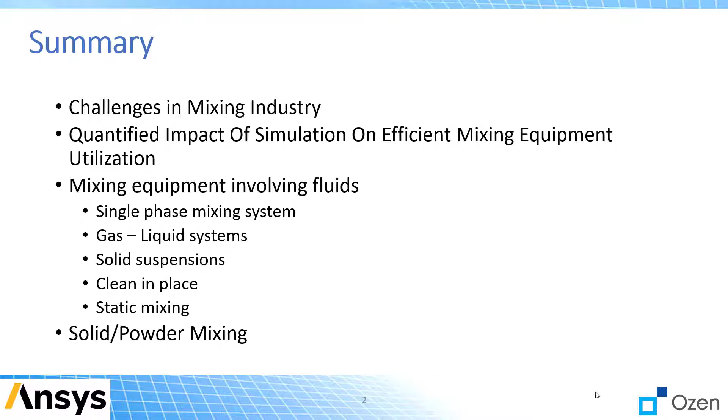Today we are going to make a presentation about simulation of mixing equipments and show you how computational simulations can improve these equipments under operating conditions. In this presentation, we are going to talk about the challenges in the mixing industry, quantified impact of simulation on efficient use of mixing equipment, and also we will show some examples of how simulation is used in this field. We will divide this presentation into sections. First, we will talk about mixing equipments that involve fluids, and later, we will talk about solid powder mixing.

Mixing is a common upstream process among different industries, let's say chemical, pharma, consumer products, food, among others. While the product is different, the objectives are similar, namely increasing the yield while ensuring the required mixing behavior and hence the final product quality. In the past, mixers seemed black boxes where processes were improved mostly by trial and error. However, the science and technology involved in the design, functionality, and application of the mixers indicate otherwise.

Generally, some of the aspects to consider in the mixer design processes are the temperature, the need of aeration, the agitation level required, and the flow dynamics behavior. Due to the lack of adequate sensors, it is impossible to perform a complete characterization of the flow inside the mixing tanks. Also, the costs associated with experimentation in mixing tanks, particularly for big ones, make it unviable to develop trial and error processes. For this reason, computational fluid dynamics has been used in the last years for accelerating and improving the mixing tank designs.

One of the engineering challenges in the mixing tank design is how to predict their performance for different products and operating conditions, as well as how to adapt these tanks for process changes. Again, the objective is to increase the yield. On the other hand, customers typically have different plants across different geographies, but they need to ensure product consistency. This is what scale up and scale down means. Let's say, how to ensure the same product is coming out from different plants having different tank sizes.

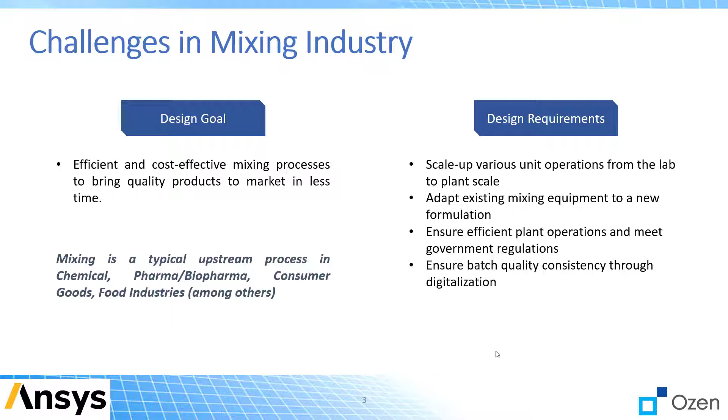For that, the design requirements can be summarized as follows. For example, doing a scale-up of various unit operations from the lab to the plant scale, adapt the mixing equipment to a new formulation or operating conditions, ensure efficient plant operations and meet the government regulations, and finally, ensure batch quality consistency through digitalization. Basically, this is what process engineers work on when they want to improve or to design mixing equipment. And for this, computational simulation is a very, very good tool to help achieve this goal.

Now, let's talk about how simulation has helped some industries improve their operations and their revenue when mixing tanks are used. One of the ANSYS customers developed an improved impeller for the mixing tank used in fiber manufacturing. The proposed design provides 5 times better mixing for solid suspensions using 12% less power. Simulation helped the engineering team make design decisions that balance mixing performance and power draw. Another customer was able to decrease the time required for cell culture growth by 40%. This means several days of time savings. Details are presented in the webinar above.

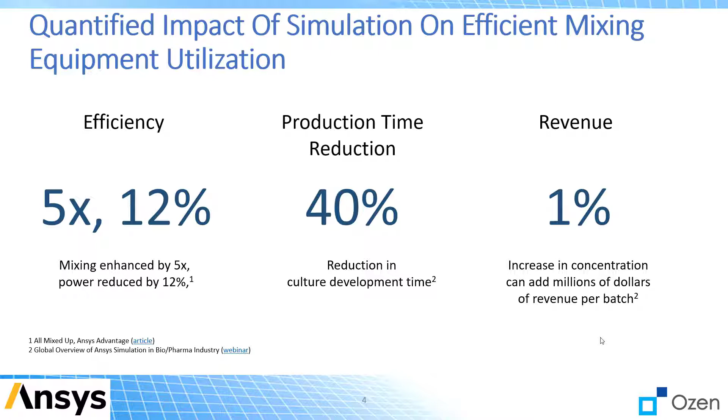According to discussions with different pharma companies, the use of simulations allowed them to have an increase in their revenues of around 1%. This means millions of dollars of revenues per batch. You can see more information about this in the webinar mentioned above. Now, let's talk about some applications for mixing equipments that involve fluids.

For doing this, it is common that the first analysis is done using a single phase mixing system. Then, with that in mind, using CFD allows to completely characterize the flow behavior in both simple and complex geometry. It is also possible to determine the influence of the tank and impeller geometry over the fluid dynamic behavior inside

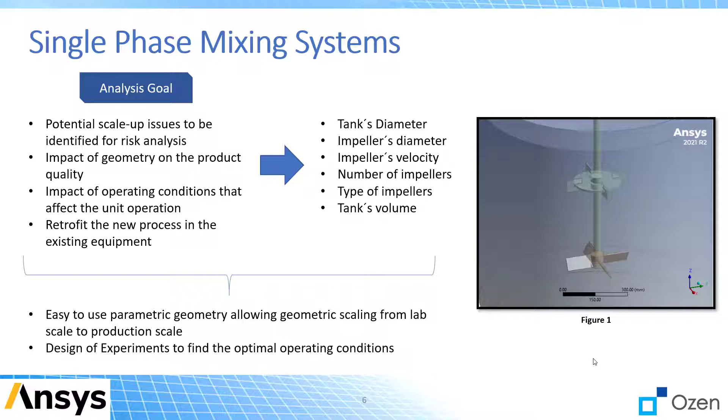To summarize, a common first approach in the design process is to assess the mixing tank behavior using only a single phase. By doing this, there is a reduction of the required computational time for solving the model, which in consequence makes it easier to do parametric studies or design of experiments to get adequate operating conditions or for scaling purposes.

As we previously mentioned, doing scale-up represents a significant challenge, both in time and money, for certain processes. By doing your own CFD analysis or by doing a consulting project with us, your company can achieve the necessary process understanding and accurate scale-up conditions for your mixing tanks to go from lab scale to plant scale. With CFD, it's possible to get valuable insights into the physics of scale-up and the risks involved.

Basically, CFD simulation helps companies in decision-making on equipment sizing and cutting down on expensive raw material usage for the testing process. Therefore, CFD simulation can save hundreds of thousands of dollars, providing characterization that applies to the overall scalability process, reducing the need for building and testing prototypes.

One straightforward way for doing scale-up using ANSYS CFD is by using the parametric analysis and the design of experiments. For example, in ANSYS applications, you can define key simulation properties to be parameters. Also, you can then manipulate the parameters at the project level in Workbench to investigate the design alternatives. A set of parameter values representing one design alternative is called a design point. You can create a set of design points in tabular form and run them automatically to perform a what-if study.

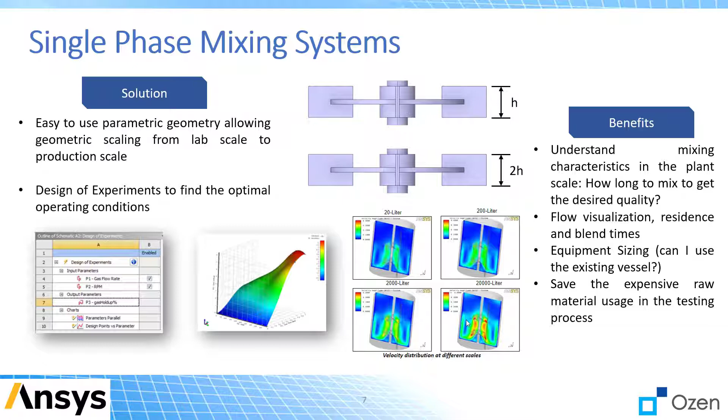For example, here you can see how the velocity distribution inside a mixing tank changes depending on the tank scale. The same procedure can be done for different flow fields, and the changes can be correlated and shown in a response surface manner for making decisions, as is shown in this picture.

Now, let's talk about another way of modeling the mixing tanks. Let's say applications where gas and liquids are involved. It is common to observe that in many systems the mixing process occurs simultaneously during filling. This historically has been a challenging problem, and while it could have been accomplished, it used to take a long time to simulate with high fidelity. Recent advances in solver technology have reduced the turnaround time for this simulation by an order of magnitude.

Also, you can see how the quantitative analysis is also linked to the qualitative analysis. Then we can visualize what's happening inside the mixer tank, but also we can check the numerical information that is also important for making decisions. This is a good feature of ANSYS tools for engineers that work in this kind of application.

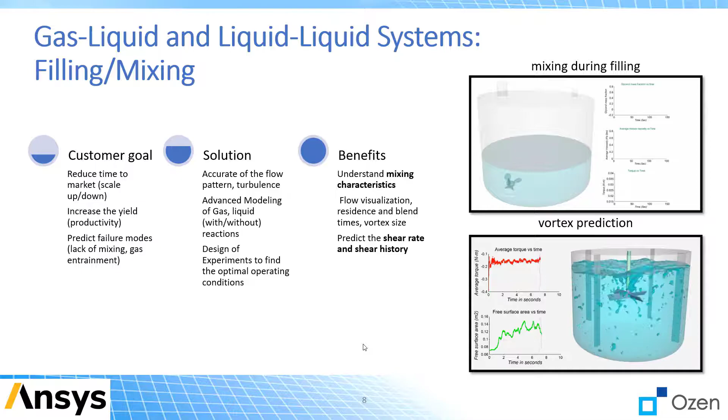Also, another application can be the prediction or the validation of the vortex depth when we have a stirring tank. For example, in this case, we compare our simulation with experiments from Ciofalo et al. Basically, we use two different approaches. We use a steady state simulation and a transient simulation using the hybrid NITA. That is one of the latest numerical approaches that ANSYS has developed, and it has given engineers a faster solution for transient simulation.

Then you can see here the comparison of the simulation results and the experiment results. They are pretty close, and this is good news. Then we can see here how it looks, and this is something that we can see using computational simulation. We can have an idea of the flow behavior inside the mixing tank, but also we can extract numerical data to compare with experimentation or with previous analysis to validate the model, or to generate new operating conditions or changes or new designs for improving the process.

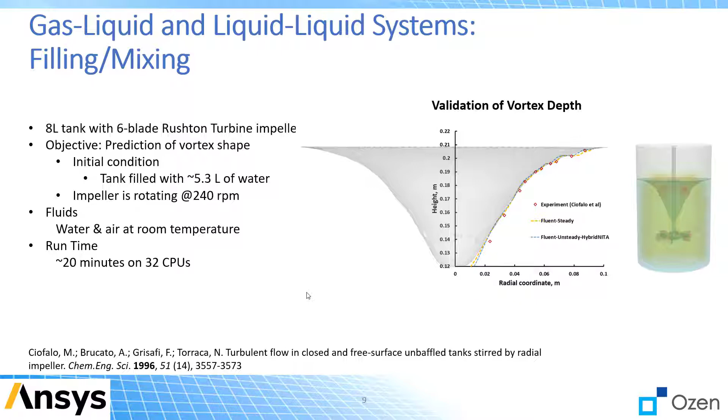Another application for gas-liquid systems are bioreactors, which are basically any manufactured device or system that supports a biologically active environment. One type of bioreactor is the air-lift bioreactor, which is a reactor for large-scale aerobic cultures where gas is inserted via an air-lift pump.

These kinds of systems have some operating problems that must be solved or avoided. For example, exotic strains of cell cultures grown in cutting-edge bioreactors result in therapies which can easily exceed $100,000 per gram of API. Ensuring sufficient respiration is critical to be sure that the goals are met. High yields mean more life-saving therapies produced per batch.

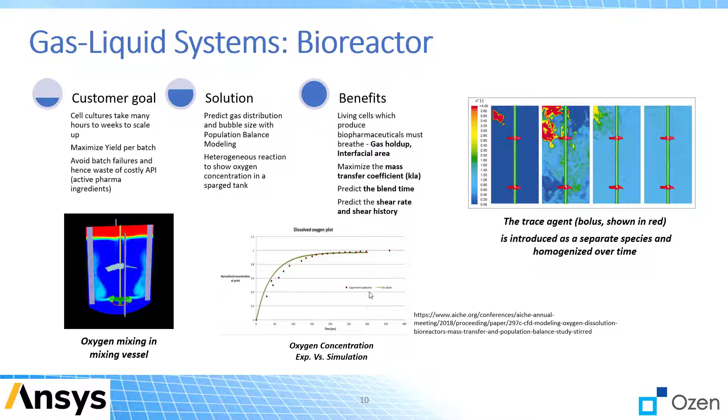Also, we can see here how a tracer agent is injected in a random part of the mixing tank and how it is distributed and becomes uniform and mixed with the solvent inside the mixing tank. It is very easy to observe this using CFD and to have insights into what's happening with the gases and with the mixing processes we are interested in.

Another application for mixing tanks is the analysis of solid suspension. In this case, the customer goal is different.

For example, the customer wants to ensure adequate solid suspension in the tank, also wants to analyze the dissolution or crystallization system, or to minimize the power requirements to have a longer impeller life and also a longer vessel life. For this, we have different solutions.

For example, we can predict the flow patterns and turbulence in an accurate way. Also, ANSYS has advanced modeling approaches for solid-liquid mixing, along with reactions or different drag models that accurately predict the particle behavior. Also, as a big part of this, we can create a design of experiments to find the optimal operating conditions.

With this, the customer receives some benefits. For example, it allows them to understand the mixing characteristics such as flow patterns, solid distribution, and cloud height. Also, they can predict the shear rate and shear history, and also they can minimize batch failures.

We can see, for example, in the picture in the left bottom corner, the effect of using one or two impellers on the cloud height and the volume fraction of solid inside the mixing tank. Also, we can see that this behavior is very similar or close to experiments. That means that the solutions given by ANSYS are tested and validated solutions for making decisions.

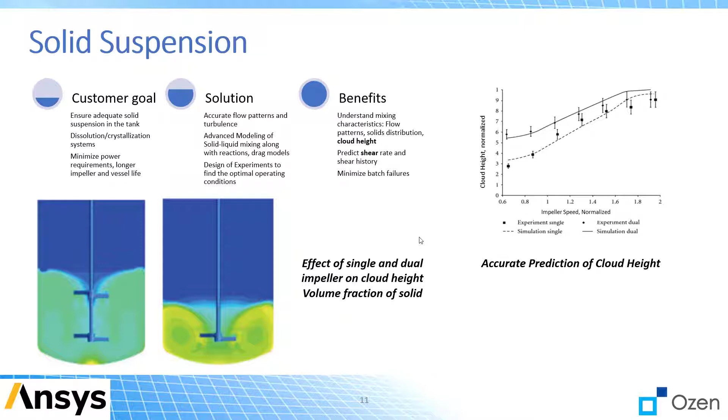Something important to remark is that understanding of solid suspension is key for many applications. For example, crystal growth, solid catalyzed reactors, dissolution studies, and situations where beads are hosting biological cells. A uniform solid distribution is a favorable outcome, but often increasing the speed may end up breaking crystals. At the same time, a minimum velocity, also called the just suspended speed, is required to be maintained.

As you can see in the left bottom animation, you can observe how the cloud height prediction and visualization can be obtained from a CFD simulation. On the other hand, the top right images come from a comprehensive analysis of a conical bottom reactor. In this case, water is used as liquid and solids are 180 microns in diameter. The reactor was subject to different agitation rates in this study.

Three rotational speeds were studied. You can see in the image that the solid distribution is compared for the three different rotational speeds. It was observed that the speeds of 100 rpm and 150 rpm are not adequate to suspend the solids. For instance, the velocity of 220 rpm was predicted to be good enough for keeping the solids suspended in the flow.

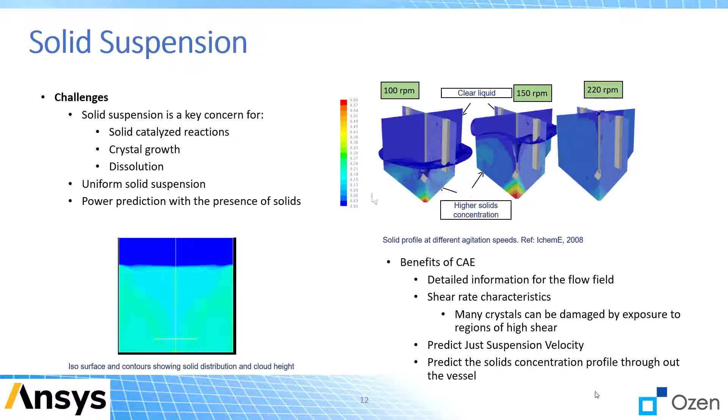For example, you can obtain the shear rate characteristics for checking if some of your solids will be damaged by exposure to regions with high shear. Also, you can predict the just suspended velocity, just to know if your solids will settle or not. Or also, you can predict the solid concentration profile throughout the vessel.

Another type of mixer equipment is the static mixer. Static mixers are common in the process industry, let's say chemical, consumer products, food, among others. They have the advantage of being part of a continuous process rather than a batch discontinuous one, which makes them attractive to high-yield processes. As always, the goal is to ensure proper mixing of the two or more ingredients. The challenge comes when the properties of these fluids are quite different.

Static mixers impose a considerable pressure drop, and hence accurate system sizing is of remarkable importance since it will directly influence the operation. At the same time, they also impose significant shear onto the system, which may result in material degradation, depending on the application, of course.

Different configurations of static mixer exist. For example, the SMX, the one that we are showing here, and the Kenics mixers are the most common. However, in recent years, there has been a development of new static mixers and new designs to improve the efficiency of mixing and also to reduce the pressure drop. For doing this, a virtual prototyping procedure using computational simulation is a good approach to prove concepts, to develop ideas, and to get the best result or the best design in a shorter time.

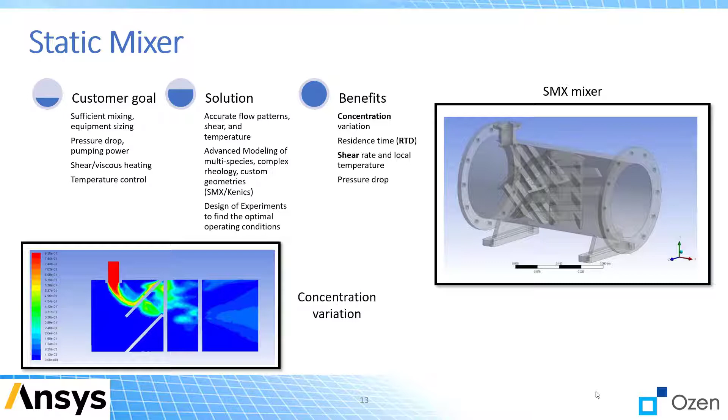And this is the kind of things that we can see and we can observe using CFD or computational simulations to get the proper behavior of the flow. Then in this case, it is obvious that the designers need to do changes in the geometry of the static mixers to get a good result for mixing. This is not working as the designers expected, but this is only possible to see in this level of detail by using computational simulations.

Finally, another application for this kind of mixing equipment that works with fluids is clean in place. In this case, the customer goal is basically to have a sufficient and consistent cleaning process. Of course, do a sizing of the systems across the different plants and to minimize and also predict the cleaning time and material. For doing that, we can do single and multi-phase simulations.

Basically, we can predict the free surface behavior, the droplet formation, and also we can estimate what is the jet behavior and how is the liquid film formation inside the tank. With this kind of models, you can analyze the effect of the nozzle and the spray for new designs or for head selections, also to estimate the time for having a complete cleaning, how much liquid you will consume for this clean process, and which is the field coverage inside the tank when you're cleaning.

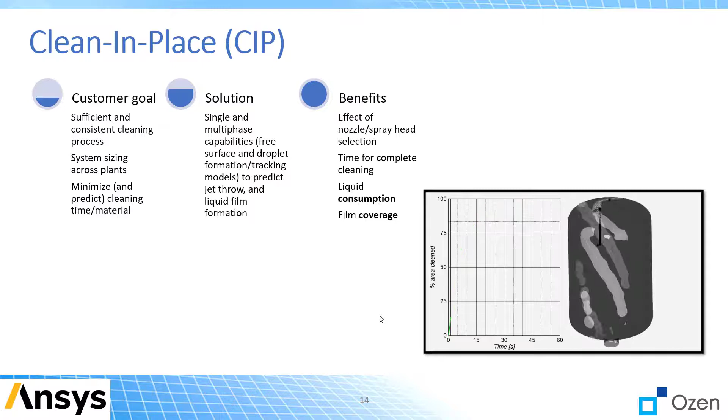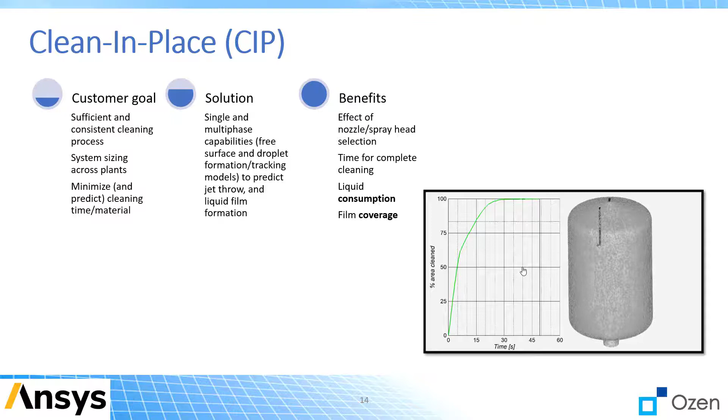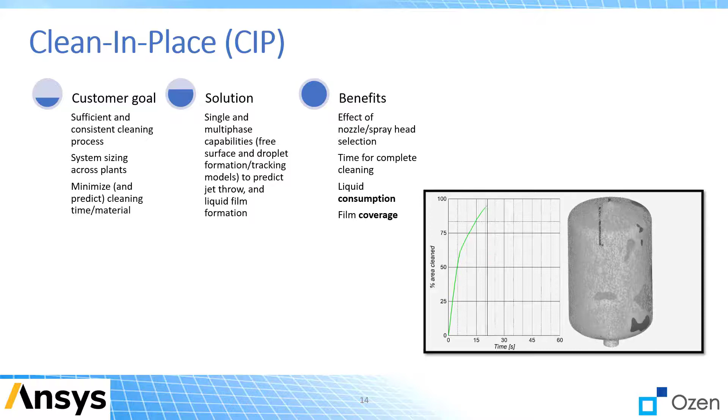Then this kind of application, as you can see here in this video, is pretty interesting for estimating operation times, or for the time that these tanks will last in the process. And for example, if you need to stop the process for cleaning the tanks, you can estimate how much time it will take. And this is a pretty interesting application for this kind of computational modeling.

Now let's talk about powder and solid mixing. Powder and solid mixing is achieved in the following ways: using a mechanical device that rotates, using a stationary vessel with agitators, using a vibration unit, using a gravity motionless device, and other ways that we are not going to discuss. Most mixers split and recombine the powders to create new interfaces and to remove segregation and stratification.

However, these same devices also can induce segregation of powders based on difference in particle size, particle shape, or density. Therefore, understanding how this equipment works is of vital importance for engineers. Three types of particle motion are generally responsible for mixing of powders: convective mixing, shear mixing, and diffusive mixing.

In the diffusive mixing, we have equipment like the V-blenders, the double cone blenders, and the drum blenders. For the convective mixing, we have the ribbon blenders, the screw blenders, and the paddle mixers. Finally, for the shear mixing, we can find the rotating drum and the ploughshare mixer. These are equipment used to transfer many types of granular material from coarse grain to very fine powders. They are used in almost all industries where granular material needs to be transported.

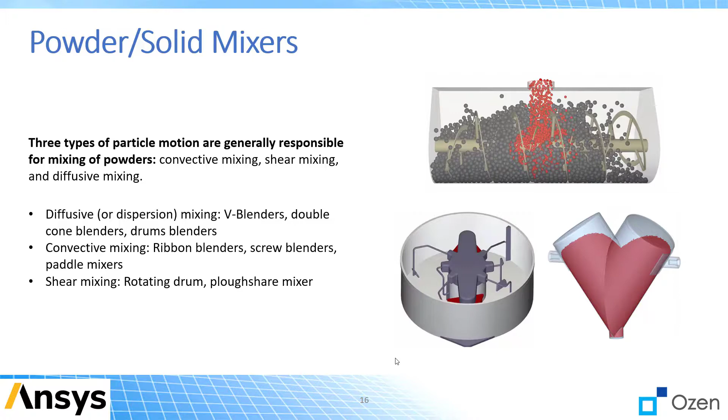We can model this kind of mixers using one of our newest tools, Rocky-DEM. With Rocky-DEM, we can apply the discrete element method for modeling particles with real shapes occupying real volumes inside the model. And as you can see in these pictures, these particles can be spherical or can be any shape that you need, with the properties of real material particles, and with the motion that they will have inside the device.

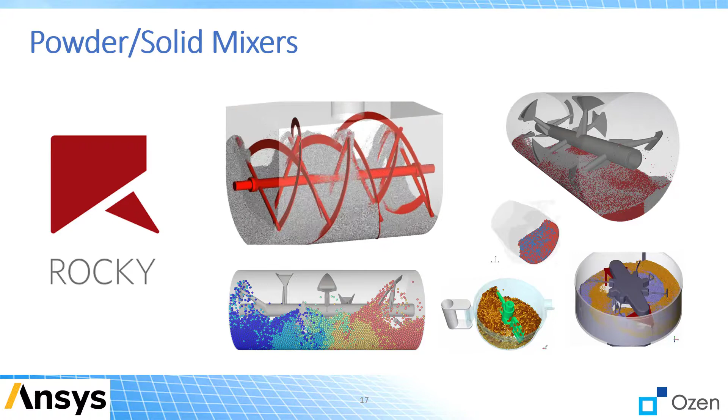Then with this kind of solver that is focused on the particle behavior, we can determine if the mixing of powder and solids is good enough, or if we need to do changes on the designs or on the concept we are testing before moving to a manufacturing stage.